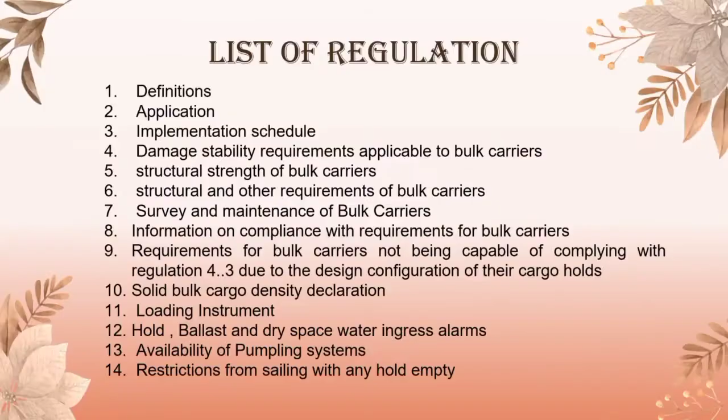For Regulation 1, the definition of bulk carriers: a ship which is constructed generally with a single deck, topside tank and hopper side tank in cargo spaces, and is intended primarily to carry dry cargo in bulk, including such types as ore carriers and combination carriers.

Bulk carrier of single side skin construction means the bulk carrier in which a cargo hold is bounded by the side shell. Length of the bulk carrier means the length as defined in the International Convention on Load Lines in force. Solid bulk cargo means a substance other than liquid or gas, comprising a combination of particles, granules or any larger pieces of material, generally uniform in composition, which is loaded directly into the cargo spaces of the ship without any intermediate form of containment.

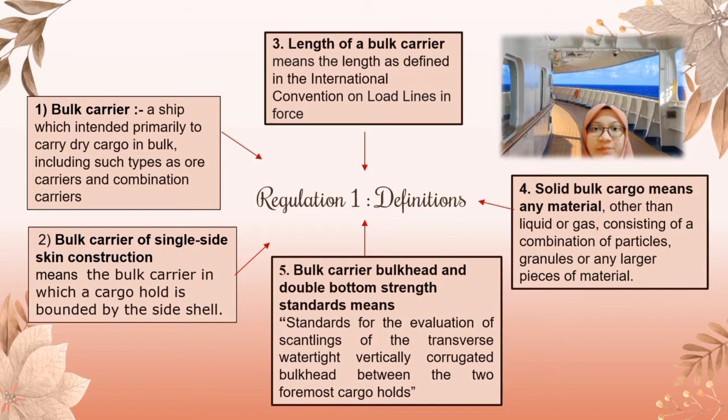Bulk carrier bulkhead and double bottom strength standard means standards required for evaluation of the scantlings of the transverse, watertight, vertically corrugated bulkhead between the two foremost cargo holds.

Next, Regulation 2: bulk carriers shall comply with the requirements of this chapter in addition to the applicable requirements of other chapters. An example of application is that the regulation applies to seagoing bulk carriers of 500 GT or over that are UK bulk carriers wherever they may be, or any non-UK bulk carrier while they are in UK waters.

Second, a non-United Kingdom bulk carrier flying the flag of a state which is not a party to the convention is not subject to the regulation if it would not have been in United Kingdom waters but for stress of weather or any other circumstances which neither the master, nor the owner, nor the charterer could have prevented.

Regulation 3, Implementation: first, a bulk carrier of 20 years of age and over on 1 July 1999, by the date of the first intermediate survey or the first periodical survey after 1 July 1999, whichever comes first.

Second, a bulk carrier of 15 years of age and over but less than 20 years of age on 1 July 1999, by the date of the first periodical survey after 1 July 1999, however not later than 1 July 2002. Third, a bulk carrier with less than 15 years of age on 1 July 1999, by the date of the first periodical survey after the date on which the ship reaches 15 years of age.

However, not later than the date on which the ship reaches 17 years of age.

Regulation 4, Damage stability requirement applicable to bulk carriers: first, a bulk carrier of 150 meters in length and above, of single side skin construction, designed to carry solid bulk cargo having a density of 1000 kg per cubic meter and above, constructed on or after 1 July 1999, shall, when loaded up to its summer load line, be able to withstand flooding of any one cargo hold in all loading conditions and remain afloat in a satisfactory condition of equilibrium.

Second, a bulk carrier having a length of 150 meters and above, of single side skin construction, carrying solid bulk cargo having a density of 1780 kg per cubic meter and above, constructed before 1 July 1999, when loaded up to its summer load line, shall be able to withstand flooding of the foremost cargo hold in all loading conditions and remain afloat in a satisfactory condition of equilibrium.

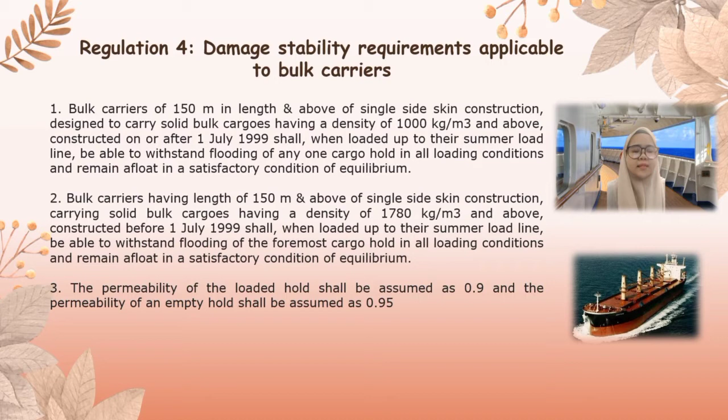Third, the permeability of the loaded hold shall be assumed as 0.9, and the permeability of an empty hold shall be assumed as 0.95. Regulation 5, Structural strength of bulk carriers.

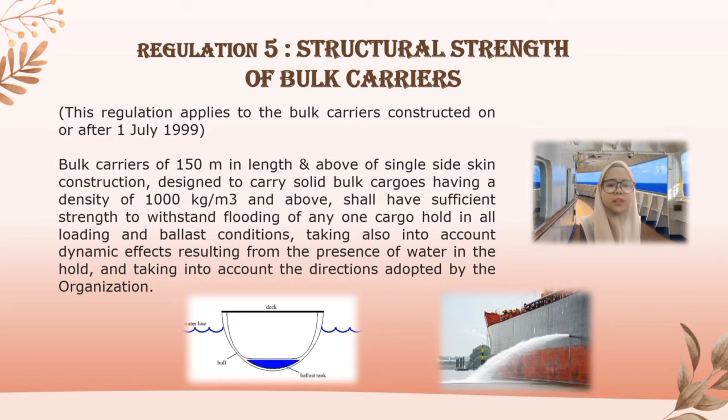This regulation applies to bulk carriers constructed on or after 1 July 1999. A bulk carrier of 150 meters and above, of single-side skin construction, designed to carry solid bulk cargo having a density of 1000 kg per cubic meter and above, shall have sufficient strength to withstand flooding of any one cargo hold in all loading and ballast conditions, taking also into account dynamic effects resulting from the presence of water in the hold, and taking into account the guidance adopted by the organization.

I will present Regulation 6, Structural and other requirements for bulk carriers. This regulation applies to bulk carriers constructed before 1 July 1999.

First, a bulk carrier of 150 meters in length and above, of single side skin construction, carrying solid bulk cargoes having a density of 1780 kg per cubic meter and above, shall comply with the requirements of this regulation in accordance with the implementation schedule.

Second, the transverse watertight bulkhead between the two foremost cargo holds and the double bottom of the foremost cargo hold shall have sufficient strength to withstand flooding of the foremost cargo hold, considering dynamic effects resulting from the presence of water in the hold, in compliance with the bulk carrier's bulkhead and double bottom strength standard.

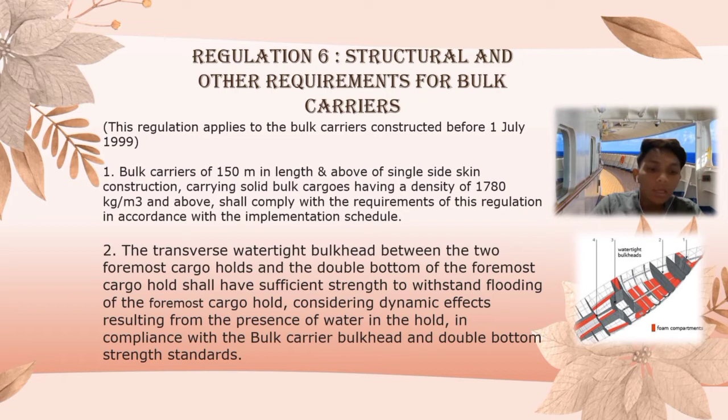Regulation 7: Survey and maintenance of bulk carriers. This regulation applies to bulk carrier construction before 1 July 1999.

A bulk carrier of 150 meters in length and above, of single side skin construction, of 10 years of age and above, shall not carry solid bulk cargo having a density of 1780 kg per cubic meter and above unless it has satisfactorily undergone either: 1. A periodical survey according to the enhanced program of inspection required by Regulation XI/2, or 2. A survey of all cargo holds to the same extent as needed for the periodical survey in the enhanced survey program of inspection required by Regulation XI/2.

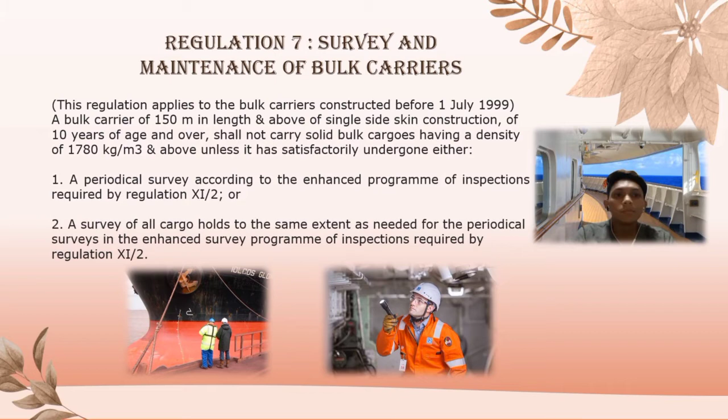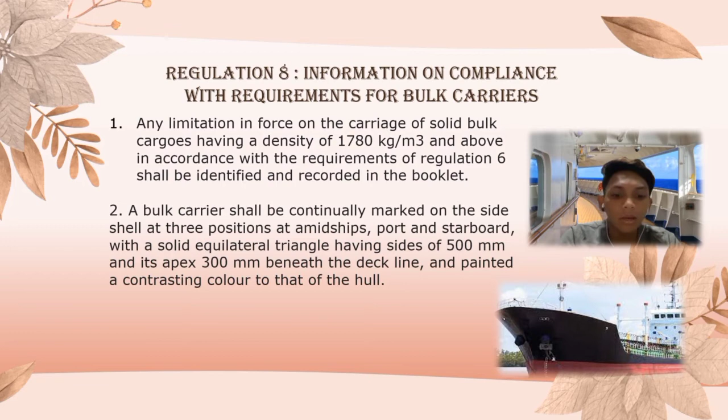Regulation 8: Any limitation in force on carriage of solid bulk cargo having a density of 1,780 kg per cubic meter and above, in accordance with the requirements of the regulation, shall be identified and recorded in the booklet. A bulk carrier shall be continually marked on the side shell at 3 positions, amidships, port and starboard, with a solid equilateral triangle having sides of 500 mm and its apex 300 mm beneath the deck lines, painted a contrasting color to the hull.

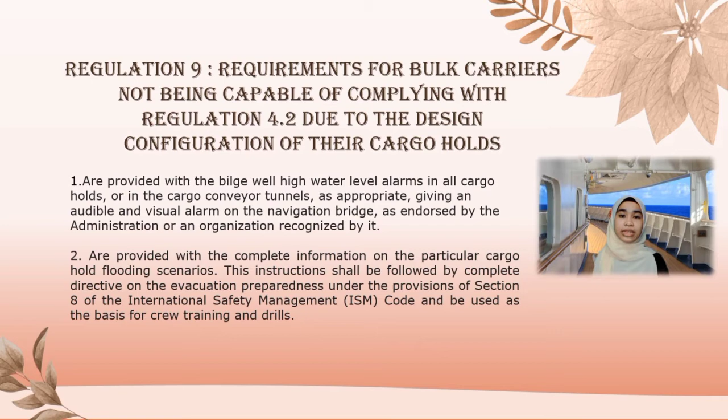Number 2: Provide complete information on the particular cargo hold flooding scenarios. This instruction shall be followed by complete directives on evacuation preparedness per the provisions of Section 8 of the International Safety Management Code, and be used as the basis for crew training and drills.

Regulation 10: Solid bulk cargo density declaration. For carriage of solid bulk cargo having a density of 1,780 kg per cubic meter or above, any cargo declared to have a density within the range 1,250 kg per cubic meter to 1,780 kg per cubic meter shall have its density endorsed by an accredited testing organization.

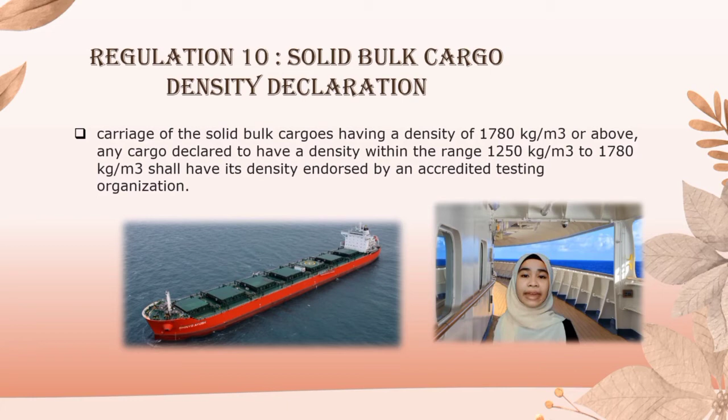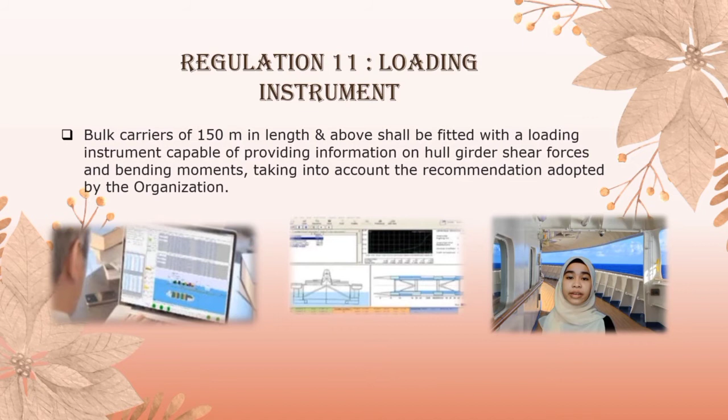Regulation 11: Loading instrument. Bulk carriers of 150 meters in length and above shall be fitted with a loading instrument capable of providing information on hull girder shear force and bending moment, taking into account recommendations adopted by the organization. Regulation 12: Hull, ballast and dry space water ingress alarms.

Water level detector in cargo hold: Bulk carriers shall be fitted with a water level detector at the aft end of each cargo hold, giving audible and visual alarm on each occasion the water level above the inner bottom of the cargo hold reaches a height of 0.5 meter, whichever is the lower of a height of a point which is not less than 15% of the depth of the cargo hold, or a height of 2 meters.

Water level detector in ballast tank: A water level detector shall be fitted in each forward ballast tank of a bulk carrier, giving both an audible and visual alarm when the liquid in the forward ballast tank reaches a level not exceeding 10% of tank capacity. A device which overrides the alarm shall be installed and activated when the forward ballast tank is in use.

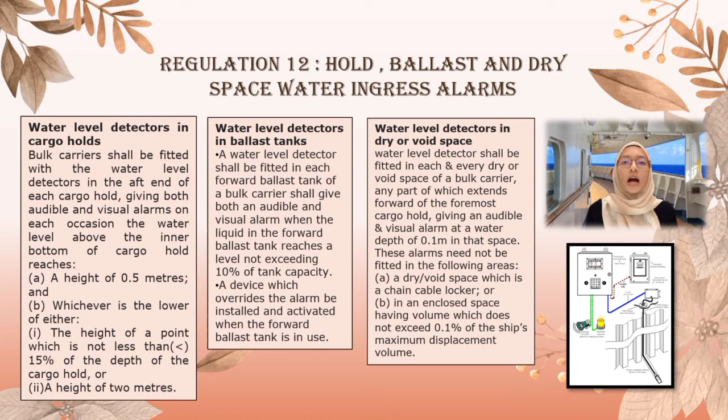Water level detector in dry or void space: A water level detector shall be fitted in each and every dry or void space of a bulk carrier, any part of which extends forward of the foremost cargo hold, giving an audible and visual alarm at a water depth of 0.1 meter in the space. This alarm need not be fitted in the following areas, a dry or void space which is a chain cable locker, or in an enclosed space having a volume which does not exceed 0.1% of the ship's maximum displacement volume.

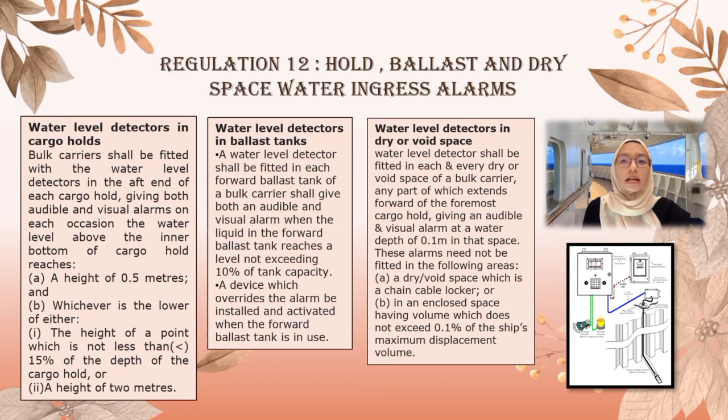Regulation 13: Availability of pumping systems. On bulk carriers, the means for draining and pumping ballast tanks forward of the collision bulkhead and bilges of dry spaces, any part of which extend forward of the foremost cargo hold, shall be capable of being brought into operation from a readily accessible enclosed space, the location of which is accessible from the navigation bridge or propulsion machinery control position, without traversing exposed freeboard or superstructure deck.

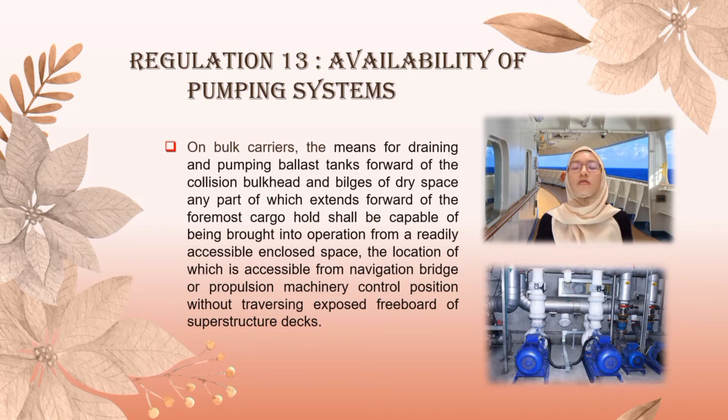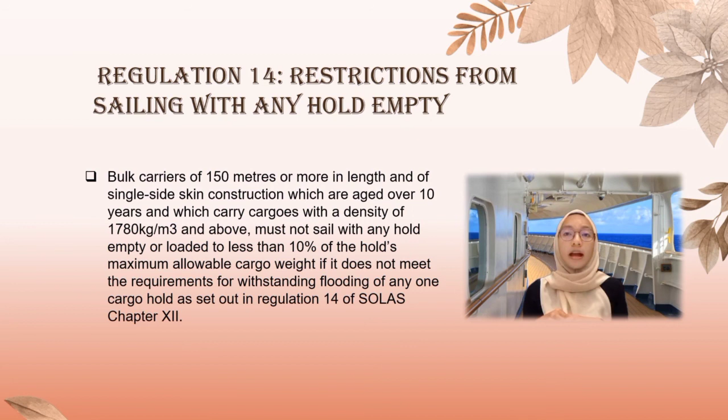Regulation 14: Restriction from sailing with any hold empty. Bulk carriers of 150 meters or more in length, of single-side skin construction, aged over 10 years and carrying cargo with a density of 1,780 kg per cubic meter and above, must not sail with any hold empty or loaded to less than 10% of the hold's maximum allowable cargo weight if it does not meet the requirement for withstanding flooding of any one cargo hold as set out in Regulation 14.

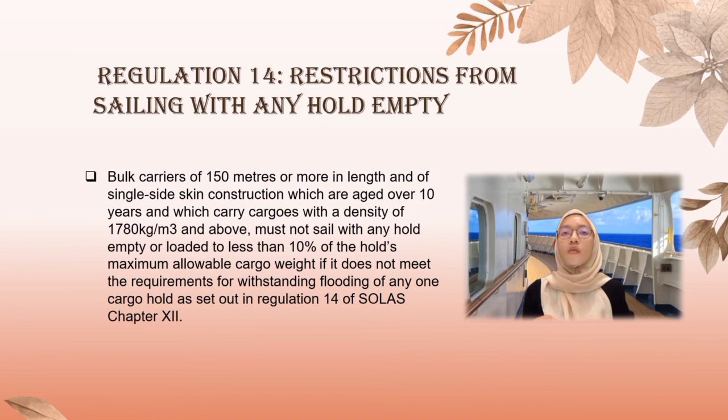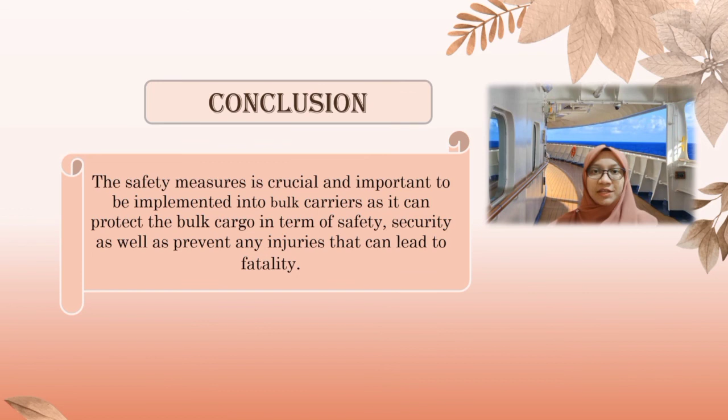In conclusion, safety measures are crucial and important to be implemented on bulk carriers, as they protect the bulk cargo in terms of safety and security, as well as prevent any injuries that can lead to fatality.